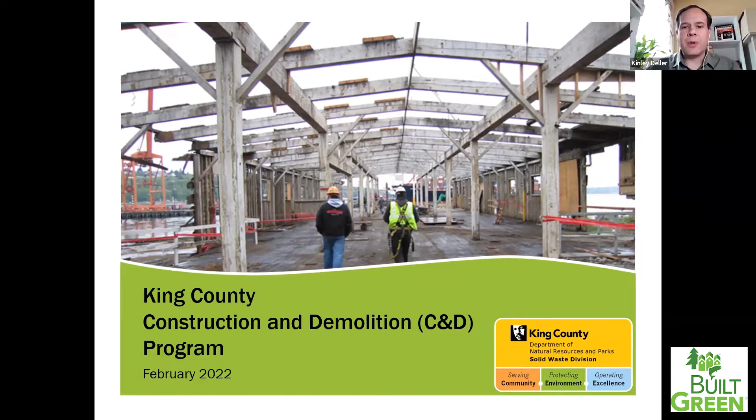Hi, welcome everybody, thanks for coming today. I am part of King County Department of Natural Resources within the Solid Waste Division, and I'm part of the King County Green Tools team, which I'll talk about now.

The Green Tools team, we kind of see it as our consultant branch in a way. We advise on internal King County projects, and we also do a lot of consulting and advising on external county projects. Our mission is to work towards a model sustainable community where both the public and private sectors seek to balance development and natural resource protection in the built environment.

We have a couple of main things that we focus on. One of those is regional code collaborations, working with jurisdictions within King County and also outside of King County in our region on developing codes. We have a community-wide green building support program, a King County internal green building program, and then there's the construction demolition program, which I'm a part of.

When it comes to construction and demolition materials, we have a number of different things we're trying to achieve. The biggest one is kind of a state mandate, a requirement, that as a solid waste division, it falls to us to properly manage the waste generated in our jurisdiction. In this case, for our program, we're specifically required to manage the C&D waste generated in King County, so it does not negatively impact public health or the environment.

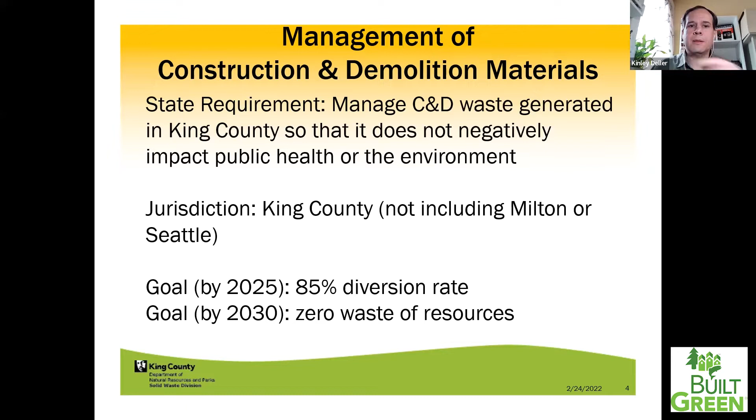Materials can be source separated. We often see this with metal, sometimes with wood. We encourage it for other materials based on the phase of your project. Those pretty much go to a single commodity recycling facility and then onto a recycling commodity processor and market. Usually things going through that single commodity stream, we assume to have a 100% diversion rate. Sometimes we calculate it at 95%, but it's usually generally assumed to be all recycled. There is some residual, we understand, but it's usually fairly minimal.

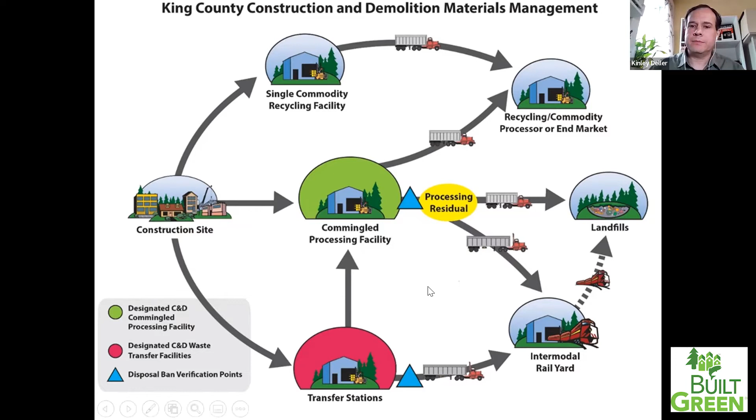All right, so the King County Construction Demolition Program in the form that it's in now basically started January 1st of 2016 when a new ordinance came into effect. That ordinance was updated a little bit in 2021, became effective January 1st of 2022. We'll touch briefly on what those changes were. There wasn't a whole lot that happened, but the direct shipment of waste is one thing that did change.

The main components of our program are that we banned construction demolition materials that have stable markets from going to landfill. We established a system for designating C&D processing and waste transfer facilities. City of Seattle has the same system, but they use the word certified. We also established a construction demolition enforcement program, with dedicated funding for that. And as part of this, it wasn't specifically in the ordinance, but part of our current program is an emphasis on construction demolition market development.

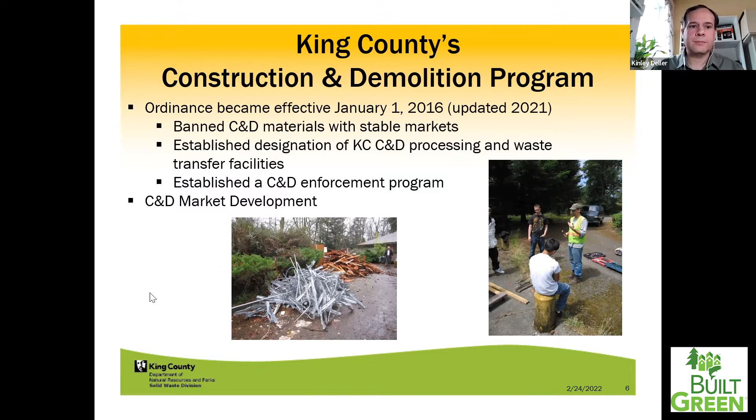So the materials that are banned from disposal in a landfill: clean wood, cardboard, metal, and gypsum scrap. This is new gypsum scrap, not demolition scrap. It shouldn't have paint, it shouldn't have anything else on it, no mud. If it's new scrap, actually a little bit of mud is fine. But for the most part, it should be new, clean, dry gypsum scrap.

And then asphalt paving, brick, and concrete. So these are all the things that are, according to King County policies, currently banned from going into a landfill. So if you're generating any of these at a job site or at a demolition site, they should be going either directly to a single stream processor or being commingled and getting processed at a processing facility.

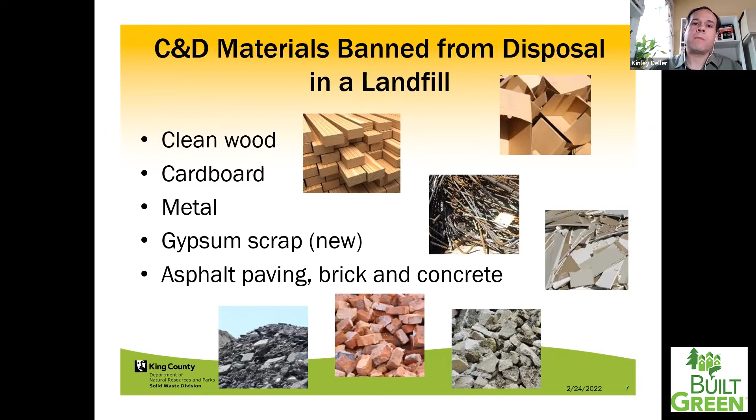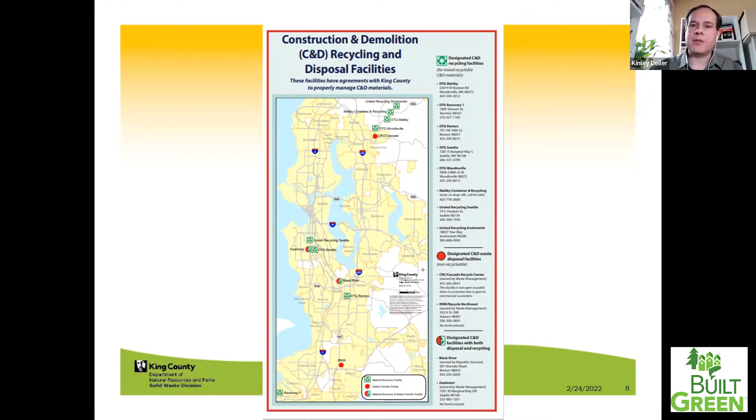Part of the reasoning behind setting up the system of designated facilities was to have control over where materials are going, because we have a requirement to make sure C&D waste is handled properly. We needed a system where all materials go to designated facilities, so we can keep an eye on them and make sure they're sending the waste where it should go and where it will be managed appropriately. That's why the system is in place.

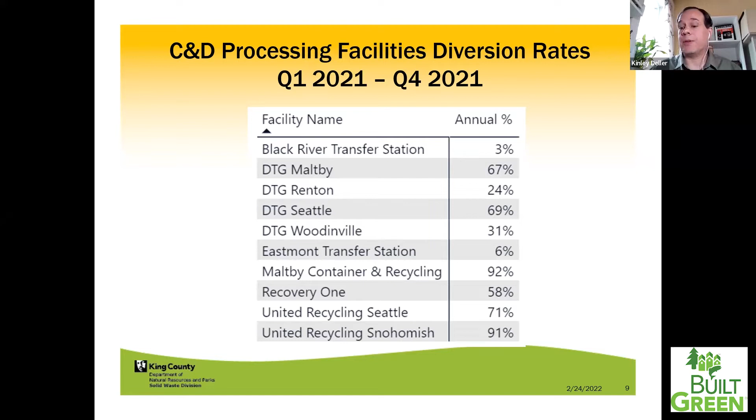King County and City of Seattle set up the system I just talked about in 2015, 2016, but there's also a national certification system called the Recycling Certification Institute, or RCI. It's a third-party national program for evaluating diversion rates at facilities. We have two facilities in our area currently certified: Lautenbach Industries up in Mount Vernon, and the Recovery One facility down in Tacoma, now owned by DTG. There are also four more DTG facilities and both United facilities currently registered with RCI, going through the process of becoming certified—it's basically a year-long process. We're working on getting all the processing facilities certified within RCI, so it's a third-party thing. King County and Seattle aren't directly involved with how that happens.

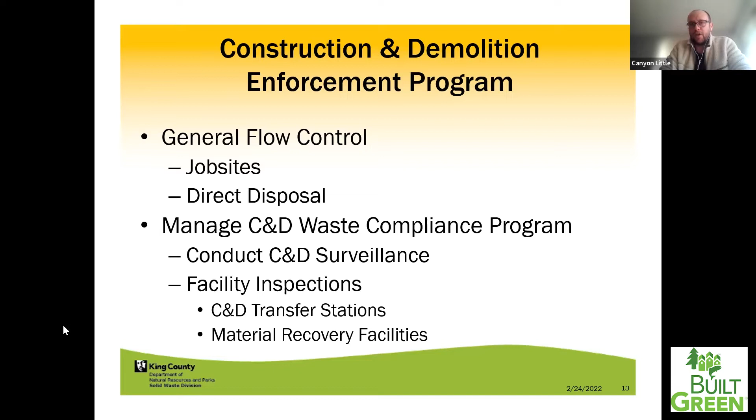With enforcement, the solid waste division takes a progressive approach with an emphasis on education, educating contractors, haulers, and property owners of King County solid waste requirements as it relates to the handling of those materials.

All right, and direct disposal. King County just got a Title 10 update that codifies our requirements for direct disposal. So King County restricts direct disposal within King County, and there are a few parameters that have to be met before contractors or demolition contractors can just use direct disposal on site. I'll go through the list briefly. The project has to exceed 6,000 square feet of building space that will be demolished.

A waste diversion plan is required, and in that plan it describes how material will be recycled during demolition, and it's submitted to the county by the contractor or any subcontractors acting on behalf of the property owner. The project must be planned in a manner that maximizes recovery of readily recyclable materials and adherence to disposal bans.

As part of the review process, the division may at its sole discretion conduct a deconstruction assessment using trained staff or consultants. Within 60 days following completion of the demolition activities, a waste diversion report accompanied with receipts from landfill and recycling facilities where the C&D materials were disposed of must be submitted to the division. The report must verify where C&D was sent in compliance with the diversion plan.

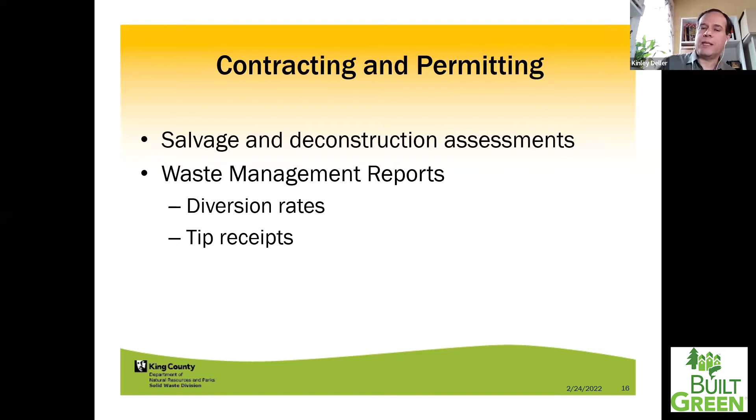So USGBC LEED program obviously has points that you can get for tracking your C&D materials. The International Living Future Institute's Living Building Challenge program also has points for tracking your materials. I believe both of those programs also have requirements now in terms of how you manage your materials and making sure that you're documenting that.

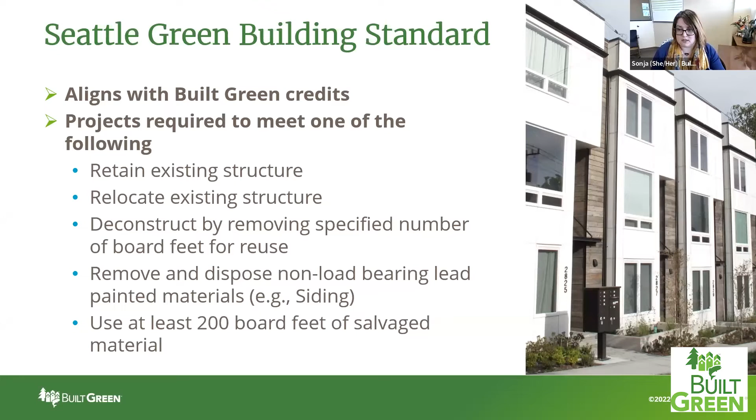So the first set of waste management credits we have is in relation to our recycling. We do have a credit now that gives you points for using an on-site 3-bin separation system, meaning instead of the 2 that are required, you'll have a third one. So you'll have your traditional landfill and maybe a commingled recycling bin, but then you would have a third bin that is a phase-appropriate source separation bin, meaning that while you're processing materials, you may have a bin - there's no size requirement. It is phase specific on what type of material you're doing, but it's designed to collect anything that you're going to source separate at that phase in the construction timeline.

So for example, it could collect wood during framing, or carpet during carpet installation, light bulbs, or drywall - any of those sort of things that you're doing at a phase in the project. So that's a 3-bin system you can get points for.

The second is pretty familiar with most of our builders, where you are required to recycle job site waste and divert it from the landfill. So the performance requirement is that you need to send at least 90% of the job site waste to a commingled facility with a diversion rate of at least 50%. And there are additional points available for using a facility with a higher diversion rate. This is sort of the standard one most builders are familiar with, using those commingled recycling facilities.

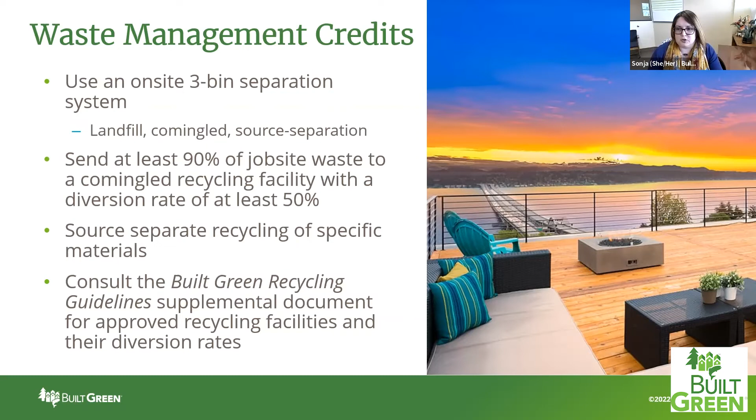Now we're going to move on to the deconstruction reuse credits. In the latest update, we really dove down into reevaluating the deconstruction and reuse credits. We reconfigured them to make them more approachable and more usable. So we have credits for designing for disassembly, where if you are designing the building using prefabricated materials or components that can be reused more easily or disassembled for deconstruction more readily at the end of the building's life, that is something you can get credits for.

Reusing or relocating an existing building for reuse is also something we added here. We changed some of these so that it wasn't that you had to reuse it on site. It can be reused anywhere, same with deconstruction and salvaging materials. So that's a change. We do offer credits for engaging a salvage professional to conduct the salvage assessment prior to demolition, or even a deconstruction assessment prior to deconstruction.

And then using deconstruction and salvaged materials for reuse. So you're going to deconstruct it, and if you salvage those materials for reuse, not recycling, for reuse, you can get additional credits there. Reuse is classified as selling, donating, or reusing the items on site or at other projects. It could be reuse, like if you have a deconstruction service that deconstructs and salvages materials and sells them at their facility, that is also applicable.

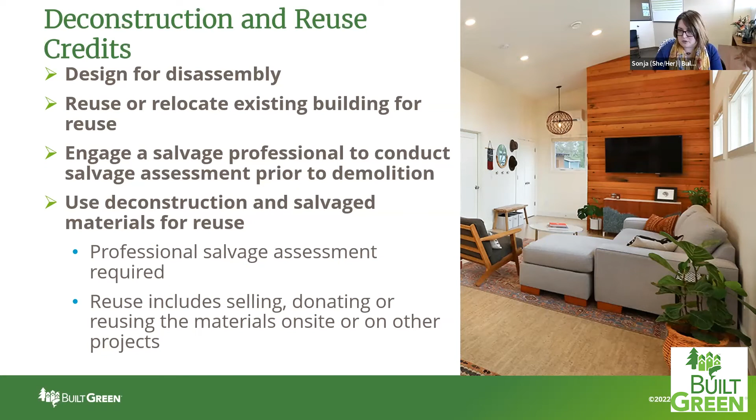These are a list of all the credits you can get for using salvage material in your material selection on your new construction project: building salvage lumber, urban harvested lumber, which is urban trees. It is not like telephone poles, that is more processed. So unprocessed kind of urban lumber. Framing lumber, flooring, doors, siding, trim and hardware, cabinets, countertops, roofing material, decking, landscape structures.

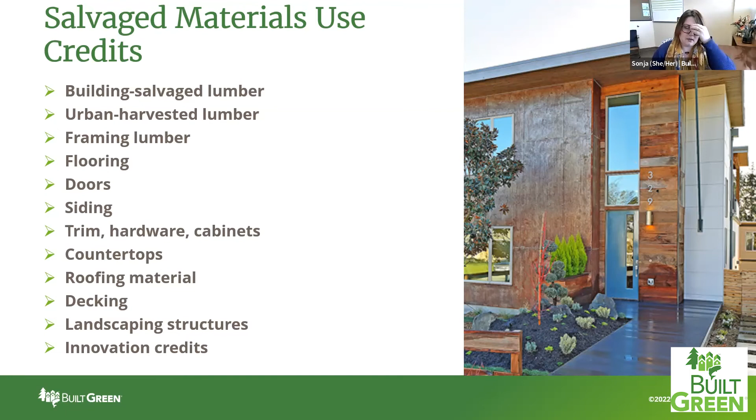And if you have a reuse of something else, there's innovation credits available if it is not listed in one of the credits available already. We also now are implicating and adding embodied carbon to the checklist in a very concrete way.

Previously, the materials section highlighted materials and efficiency that contributed to reducing embodied carbon. But in this latest version, we took that to another level, and not only reevaluated every credit in terms of how it's impacting embodied carbon, whether that's through the production of that material or the efficiency of use, or what it contributes to climate as a whole.

So not only were all the credits evaluated for their carbon impact, but we also added a credit for actually calculating the embodied carbon of your building project. You'll get 20 whole points for just calculating the embodied carbon of the new building. If you then go one step further and show a reduction of at least 10% off a baseline building of the same type, you can earn 30 points.

If you are familiar with the materials section, you will notice these are very large point credits. For example, in a typical 4-star project, you need 60 points in the materials section to qualify for that star level, and 20 points are offered just for embodied carbon calculation. So this is something we're really trying to encourage.

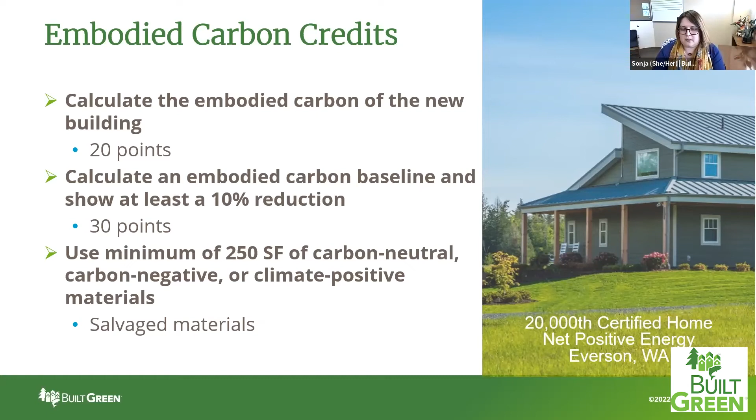One of those materials off the bat is salvage materials. So in addition to the credits you'll get for using those salvage materials in the materials credits, you will also be eligible to utilize this credit in addition to those. So we're really trying to encourage reuse of both materials and structures in these credits.

Lastly, one of the other considerations in terms of deconstruction versus demolition is there are specific deconstruction contractors that we know of that can help builders earn points in their equity and social justice credits, in addition to just the deconstruction material credits. So if you are using a Built Green member on your projects, that can be part of the equity and social justice credits that are now also required for Built Green projects. Some of these firms may be WMBE firms.

The other thing is you can hire temporary employees or apprentices through WeldWorks or other equivalent organizations that focus on hiring and providing jobs for system impacted individuals. And this extends to first tier subcontractors - it doesn't have to be the general contractor. It can also be brought in by first tier subcontractors, so the deconstruction services. Or if a deconstruction firm has a standard practice of hiring system impacted individuals, they also meet the intent of this credit. So these are some ways that those contractors can help builders meet those performance requirements for those credits and can contribute to that performance requirement.

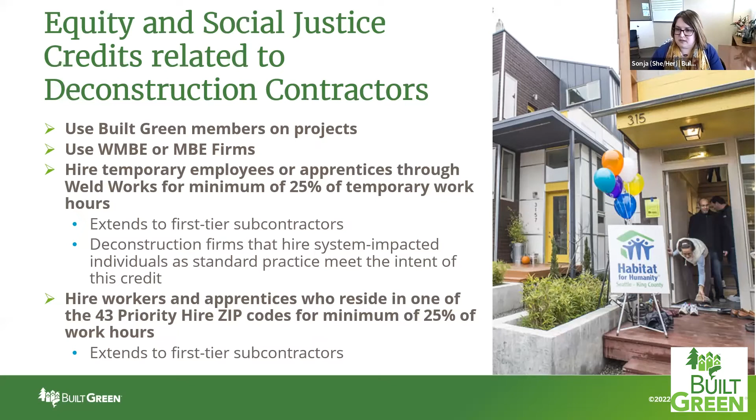So those are the Built Green credits, and I see a lot of things in the chat, so I will pause for questions now.

We have a question from Greta Sonia that hasn't been addressed yet: since the 3-bin separation system overlaps the commingled and source separated credits, is a builder able to claim points for all 3 credits as applicable to their project? Yes - that's all I need to say is yes. You can claim all 3 of those together. They can be combined.

Fabulous, thank you. And I think that's all I see in the chat. Sonja, there was a question in the chat about - where'd it go? Pam's question: the recycling diversion rates, do they apply based on the permit date of the project?

So the diversion rates are based off of the receipt date. So if the date the haul was dropped off at the facility was, let's say, June of 2019, that's the date you would look at for the diversion rate, and it would fall within that period. So in the recycling guidelines, you'll see there are multiple columns, because obviously our projects take more than one cycle now. So you just look at when those dates are implemented for the diversion rates, and wherever your receipt falls, that's the diversion rate they're able to claim for that load. So go by that date - it's the receipt date.

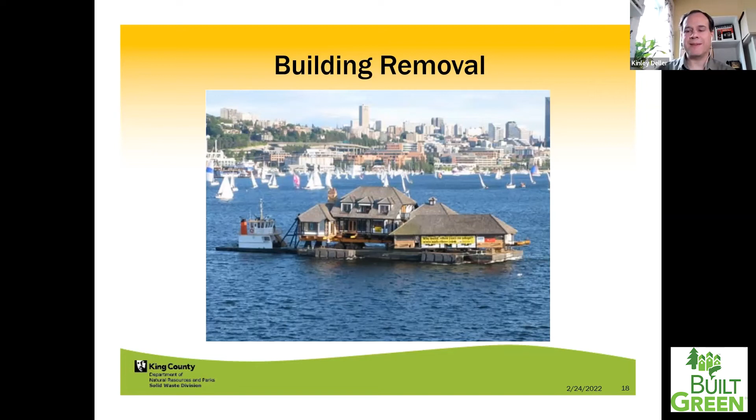But when it comes to C&D materials, it's not quite so easy. There is some mechanized sorting that happens, but for the most part, it's people standing by a conveyor belt going pretty darn quick, pulling off the stuff that has value. That's how it's done at most facilities around here. The more stuff is mixed together, the more effort has to go into separating it out, and the more the materials get handled, the smaller the pieces get and the less value they have.

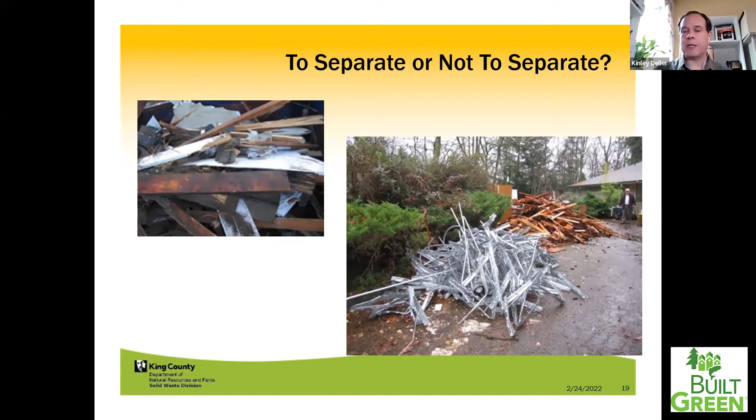Hazardous materials is another reason you should think about separating stuff. There's a study down in Portland that when asbestos abatement was done, half of the buildings, when somebody went through and deconstructed them, they still found more asbestos that had not been recovered. It was friable asbestos that should have been removed. The big point here is that non-friable asbestos becomes friable when crushed.

This I got from talking with people at Labor and Industries and with the Puget Sound Clean Air Agency. They have different definitions of what it means for something to be crushed, whether it's done by hand or equipment. I believe that's where they can't quite decide. But the essence of this is that even if you have non-friable material, it really still should be getting handled separately.

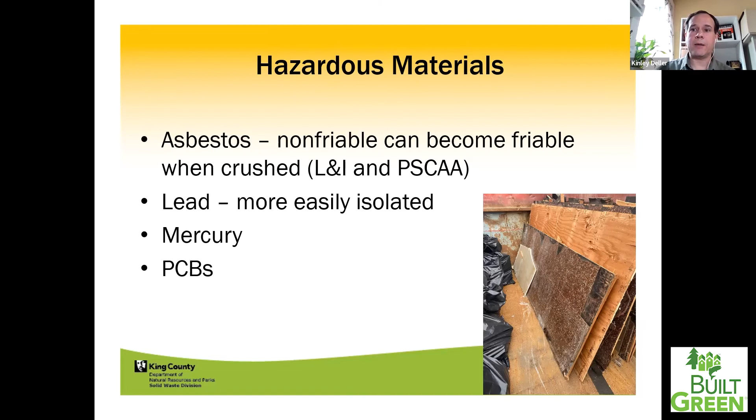The other thing we work on at King County is market development. Terrence Darby is the third part of the C&D team, along with Canyon and I at King County Green Tools, and he's on vacation this week so he wasn't able to join us. But he's been doing a fair amount of market development. We did a grant program a couple of years ago to try to get a few materials moving forward.

These are the main commodities we've been looking at. Metal, both ferrous and non-ferrous, is usually the first one for people to keep out, and it typically hasn't needed a whole lot of help over the years. But we're keeping an eye on it.

Cardboard has become a huge issue in the last few years since China stopped accepting a lot of our fiber and started getting a whole lot more picky. Construction cardboard is harder to deal with than what's generated at a grocery store. It's at a job site, usually hard to keep clean, hard to keep dry. But that's what it really needs in order to have value.

When you mix cardboard in with all the other C&D materials, especially in an open top bin, which a lot of them are, and you're in the Seattle area in the winter, the cardboard gets pretty wet and doesn't have much value by the time it reaches the processing facility. So if you can find the space and figure out a way to keep your cardboard dry and clean, it can actually get recycled.

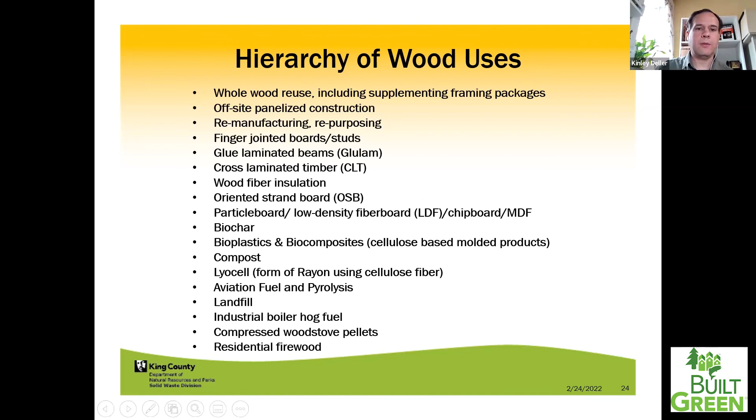Our goal, our mission within Green Tools, is to build wood back into buildings. Rather than the current system where nearly all of the wood coming out of new buildings as scrap, or from used buildings when they're demolished, almost all of that material—about 300,000 tons a year of clean wood—is either getting buried in a landfill or being burned for fuel.

And granted, there is some benefit compared to, say, coal as a fuel, or even natural gas probably. But in terms of the value of the material, we'd really like to see it going to a higher and better use.

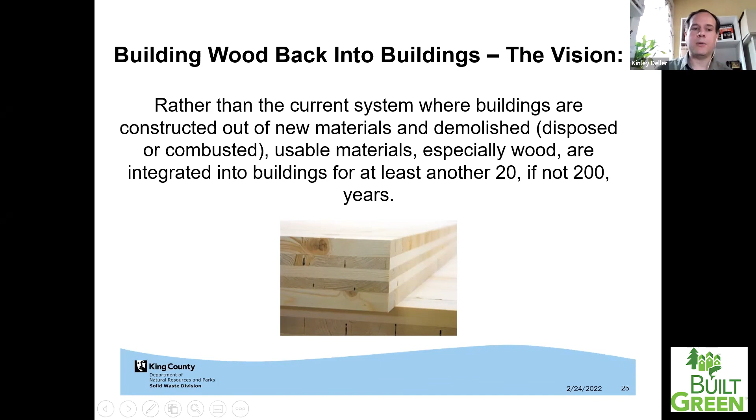Like that carbon stored. So here's what you typically see when you go to a transfer station or a C&D processing facility: a bunch of little pieces of wood, some longer than others, some of them dinged up. We've been talking with a lot of different people, different industries, about what can be done with that wood. And what we're heading towards is making a product like this.

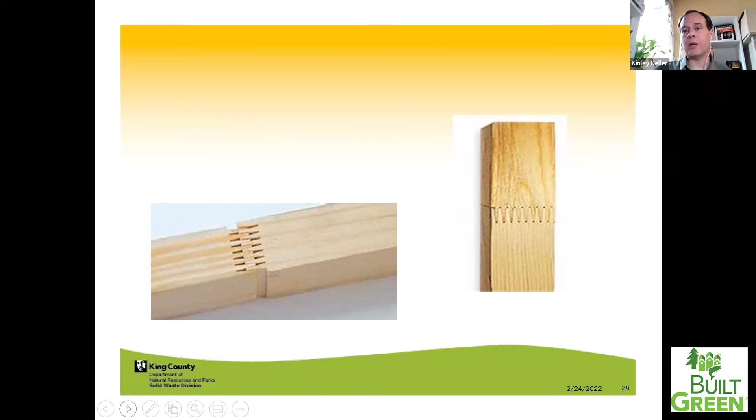I have a little sample here I'm going to hold up for you guys. This was one that was done at a lab at OSU, taking salvage wood and turning it into a CLT panel. They did stress tests on it, a lot of other testing, and there's a lot of other testing that's been going on in Europe. We've been plugging into that, and there's a couple of CLT manufacturers interested in this.

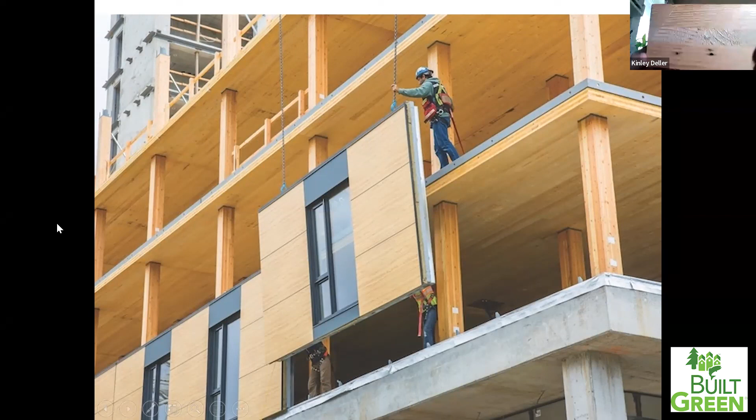The idea is that the wood would be going to the salvage lumber warehouse and go through some fairly high-tech, high-speed processing—doing acoustical assessment of the boards to determine strength, to determine where the voids are, where the metal is, and cutting those pieces out. The small pieces would then go for recycling, and the metal would be pulled out for recycling.

The smaller wood pieces would probably go towards hog fuel, although we would love to start some industries that have higher uses for really small pieces of wood in mind. So yeah, this is the general concept. I'm not going to walk you through all of it, but I'd be happy to talk more with anybody that wants to at some point in the future.

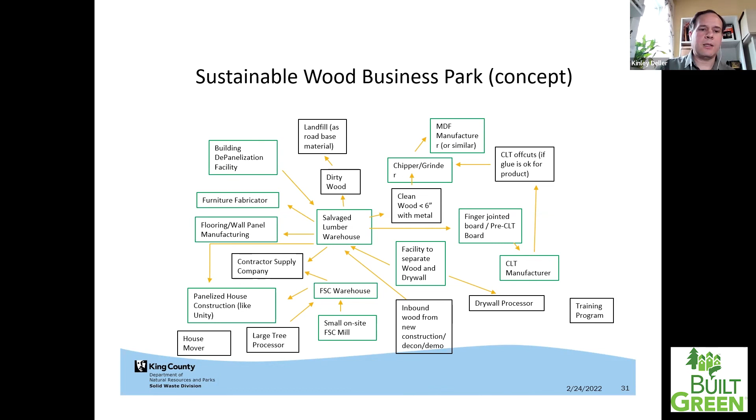Another thing that we've done to try to make wood more usable, especially in its whole piece form, is to work with the Washington State codes.

The Washington State Residential Code was changed, approved for the 2018 code. It basically says if you have a piece of used sawn lumber that's 2x6 or 2x4, it can be assumed to be spruce, pine, fir, stud grade. It doesn't have to get stamped, and you don't have to bring in a grader to stamp all the wood. And if it's larger than 2x6, then it's assumed to be hem fir number 2.

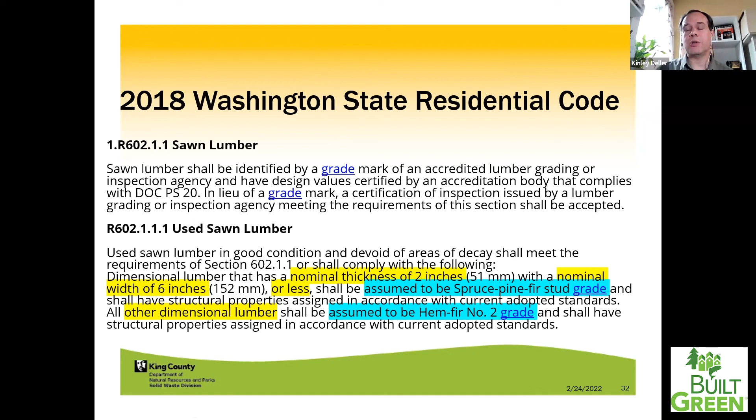We went through a lot of work talking to a lot of people, a lot of wood graders, getting their input, and we got it through the state building code. A similar code proposal is currently before the Washington State Building Code Council, which would apply to commercial buildings. It's almost identical language, so I don't need to read it.

So in summary, recycle commodities separately, use the designated facilities, it's required. Refer to the official diversion rates. A lot of the facilities create their own diversion rates, sometimes load specific rates, based on visual observations. LEED currently, I believe, still requires that if you're doing individual load assessments, they need to be done on a weight basis, which is really time intensive and therefore costly.

Sometimes the verifiers for the different green building programs won't question load specific rates, but a lot of times they will. So you're kind of rolling the dice if you're going with that. I would go with the facility rates that are on the City of Seattle page or on the RCI, the Recycling Certification Institute webpage. Those are the official rates. And always know where your materials are going.